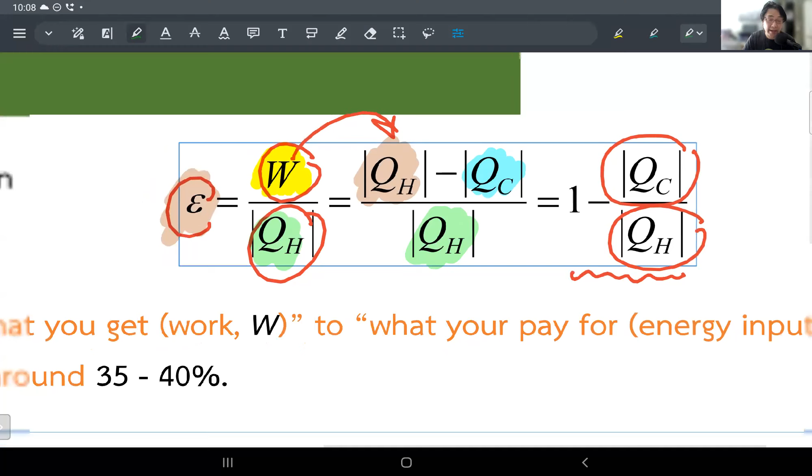Okay, guys, with me? So this is going to be the main equation describing the efficiency of an engine. This is it. What you get over what you have to provide, that is the key concept of efficiency in general. Like the example I talked about last time: I teach 2 hours. How many minutes do you actually get the material from this lecture? That's the efficiency already, right?

Okay, let's look at the quick example right here. So now we do some calculation. All right. You have a gas engine, burns 0.2 gram of fuel and delivers 2000 joule of work per cycle. So does that make sense? So this is what happens in your car engine. So you burn some oil, some gas and all this stuff, and then you get some energy from that chemical energy stored in the gas.

Given that the heat of combustion, that's the heat that you get after you combust a gas. You have the heat of combustion equal to 5 times 10 to the fourth joule per gram. So this means every gram of gas that you burn, you will acquire 5 times 10 to the fourth joule. Okay, cool. All right, find the heat discarded in each cycle and the thermal efficiency of the engine. All right, so that's good.

So first of all, you have only 0.2 gram to burn. And each gram, you get this much of energy. So how much energy do you actually get from the combustion? So that's Q equal to the mass that you're going to burn times the heat of combustion. So when you look at this equation, it looks like the latent heat, right? But that is just a general way of writing a product between the amount of mass times something per unit mass. That's what it is.

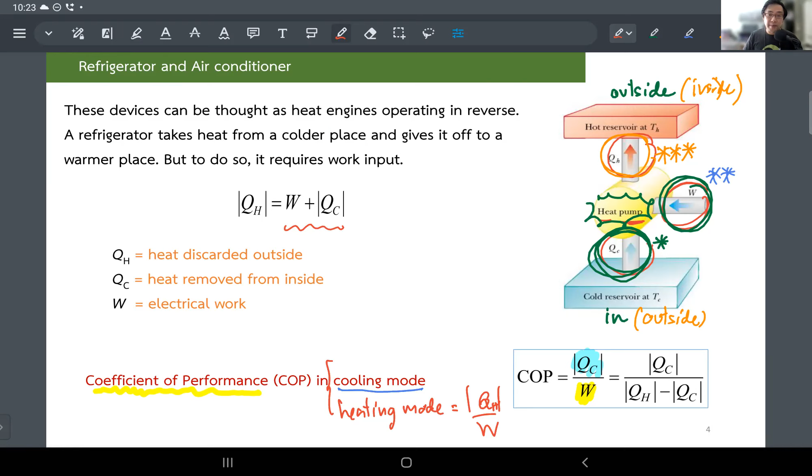So I hope you see the whole grand picture of the heat engine. And now what we are trying to get to is this. Now that is the fun part. What I am trying to get you to do is, first, apply the first law of thermodynamics. Second, know how to calculate the efficiency of an engine.

But now the third one: I'm going to introduce to you the part of the second law of thermodynamics. And that would be crazy. Once you sort of understand this concept right here, you will be able to tell what is going to be the best thermal engine in this universe.

All right. Tony Stark cannot do better than this as long as he wants to use a thermal engine, which he is not using, I guess. He used some nanotech or, I don't know, some weird nuclear, I don't know. All right.

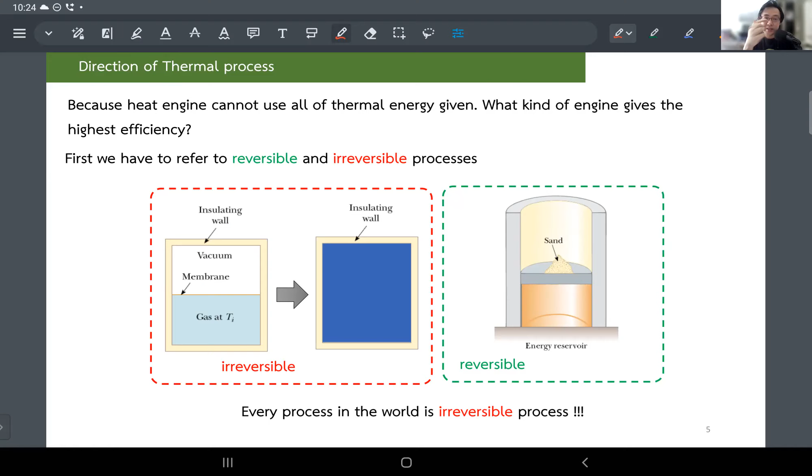Now look at this slide right here. Look at the left and the right. We have seen this already once or twice. You have a wall that is insulated. You have the gas in that tank. So you have a container with an insulated wall. And let's say the gas initially is at the bottom half of this tank. It's being divided by a membrane. Okay, sounds good. But then suddenly somehow the membrane just expires and it breaks. So the gas just fills up the whole space inside this container.

So we already know how to calculate this because it's PV equals nRT. So what you can do is PI VI over TI equals PF VF over TF. But then you already knew that the temperature will not change because you insulated everything. We learned about this one. There's no heat flow in and out. There's no work because it's not expandable. And from the first law of thermodynamics, this process is nothing. It's a free expansion. It just expands for free. You get nothing at all. So you know that the temperature will not change as well. So that's an application of the first law of thermodynamics.

I think you start to see the connections. So that means the temperature can be canceled. So this one is easy: the gas volume is twice as big, so the pressure will be reduced in half. So in terms of the property of gas, no problem, you can calculate it. But one thing that is sure, this process cannot get reversed. It's impossible to go back. So I am introducing to you now another word, the reversibility of the process.

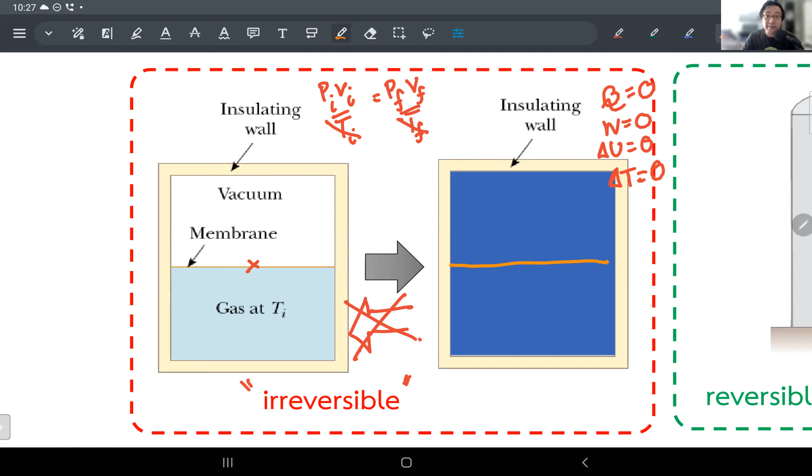There might be a case that you wait long enough and there will be some accident where all of those molecules suddenly decide to stay at the bottom half of the tank. Yes, there is a possibility there. But if you take into account the amount of molecules in this tank, it's going to be like Avogadro's number. To have those molecules with that big of a number in harmony, collectively, like, hey guys, let's gather around at the bottom half of the tank, for those of you who do math, the time for that will be longer than the age of the universe. So you wait until the end of the universe, you might not be able to see this event occur. Does that make sense? All right, so we will conclude that it's impossible.

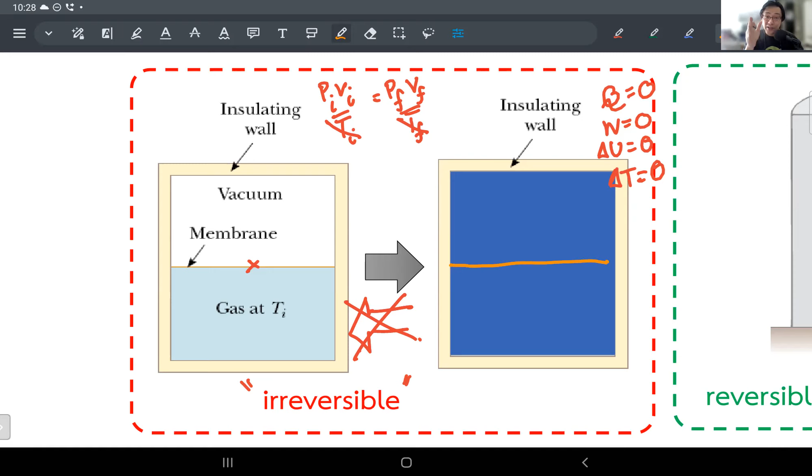Okay, forget about gravity for now. Time machine, gravity is later. That's not what it is yet. But we'll discuss a lot more fun with the concept of this irreversibility and time. They are somehow related. Anyway, so that's how irreversibility comes into the picture.

But now look at the right-hand side. It's almost the same scenario. So you have a gas, initially the exact same volume as this. But now you have a piston, a movable one that you can lower or raise up and down. And at the bottom, you attach this to the energy reservoir.

So when you have an energy reservoir, everyone understands that what it means is you fix the temperature, right? Because we already agreed that once you have some big source of energy, you cannot change its energy easily. It's too big for you to do anything. So that forces the gas in your container to have the same temperature as the energy reservoir. And this temperature will not change. So you already meet the same condition of no temperature change.

When no temperature is being changed, that means your internal energy will not change either. Cool. But because you have a movable piston there, you can actually do the work and there will be some heat flow. Okay, you guys with me?

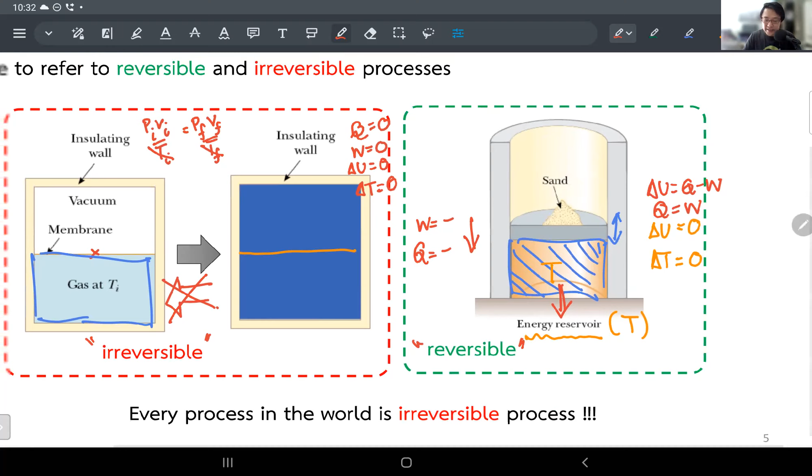You say, well, Ajahn, I changed my mind. I want to pick up the sand one by one. All right. And once you do that, it's going to slowly lift up because the weight that is pushing the piston down is getting smaller and smaller. So it's going to come up to the original position again. So in that case, it looks like you are trying to get to a process that is reversible. You guys with me?

And this is the thought process about the word that we skipped. I don't know if you still remember, but there is a word where I said, okay, I'm going to talk about this later. It's a quasi-static process. When I say quasi-static process, it means it's sort of static, but not totally static because you still want to move things around. But you move it so slowly that at any point in time, it looks static, and you do not disturb the system too much. Does that make sense? It doesn't make sense, I know. But yeah, that's what it is. So now you start to see, well, Ajahn, what we have been studying is in our imagination. The answer is yeah.

Oh, I still have the music on. I suppose you just have a sound effect right here.

The reason is, in reality, when you let the gas into a tank, it just flows, right? You have to wait a little bit for the gas to disperse everywhere, and then you measure the pressure. But right at the moment you let the gas into a tank, there'll be some part of the tank that doesn't have anything yet, and some part filled with crazy gas running around. So you have to wait for the gas to disperse and everything to be in equilibrium, and then you measure the temperature, the pressure, and everything. Does that make sense?

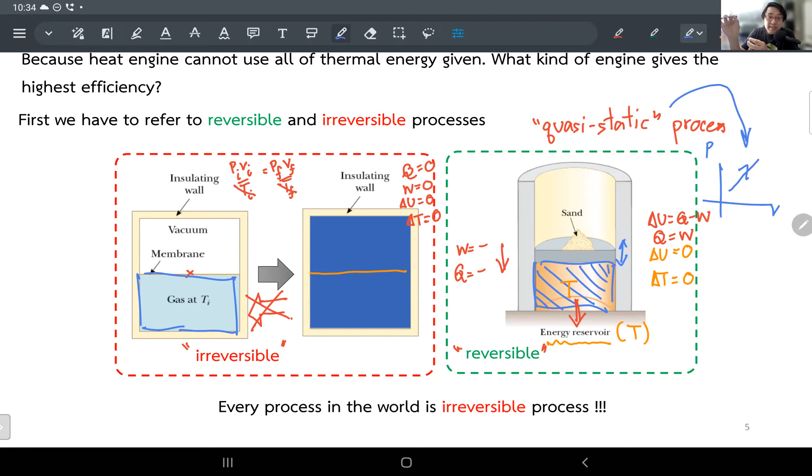So that's why whenever you have a PV diagram and you draw some process on it, that has to be done in a reversible way. That means to walk through those processes, you have to do it slowly enough, because at each point you should be able to measure the pressure and volume correctly. You don't have to move and stop, but the change has to be gradual enough for you to measure the pressure, volume, and temperature with good numbers representing the whole system. Okay, sounds good.

All right. But in reality, that's not what you do. So this is the reason for the weird conclusion of this slide. It turns out the process in this world, I use the word world, but I could say the universe, I think.

I just want to leave some possibility there. All right. Every process is irreversible, guys. Seriously. Woo-hoo. Yeah. All right. You're getting older. It's not reversible.

What else? You have a glass of water that's hot. You have hot coffee. You have it sit there. It's getting down to room temperature. It's not reversible. You cannot make the coffee hot again by itself, of course. I mean, you can warm it up using a microwave and stuff, but by itself it's not.

You have an ice cube melt at room temperature. You cannot reverse that process by itself. It's not possible. Yeah, you see? So every process that happens, those are irreversible. Yeah. All right.

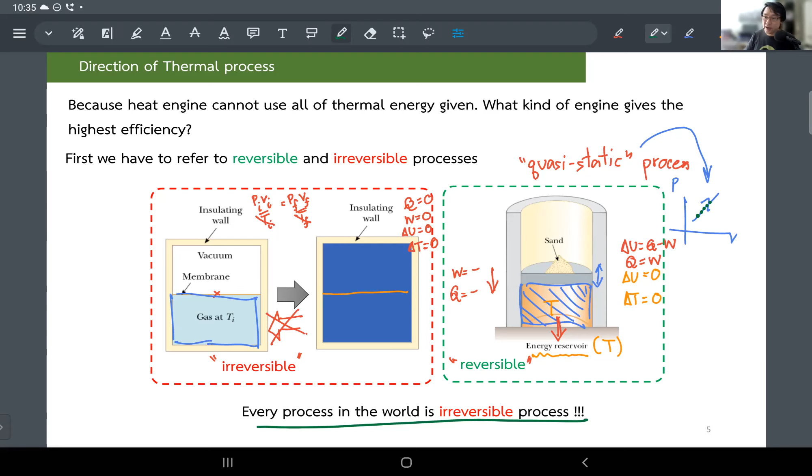There are a couple comments there. Oh, just wait there. Hold it. All right, we'll get to it.

All right. So why am I talking about this for so long? It took me like 10, 15 minutes to talk about this. Guys, look at this. This is very crucial. And it might sound vague to you, it might sound sort of unclear, but if you try to wrap your heads around it, it's going to make some sense. Okay, think about this. So now we are focusing on reversibility and irreversibility, okay?

So over here, you have a metal box, quite hot, 70 degrees Celsius. You have an ice cube in there at 0 degrees. Wait a little bit, the ice melts, the metal box cools down. You end up with liquid water at 40 degrees Celsius. This is good, but you are sure this is definitely not reversible. Impossible for you to go back. With me?

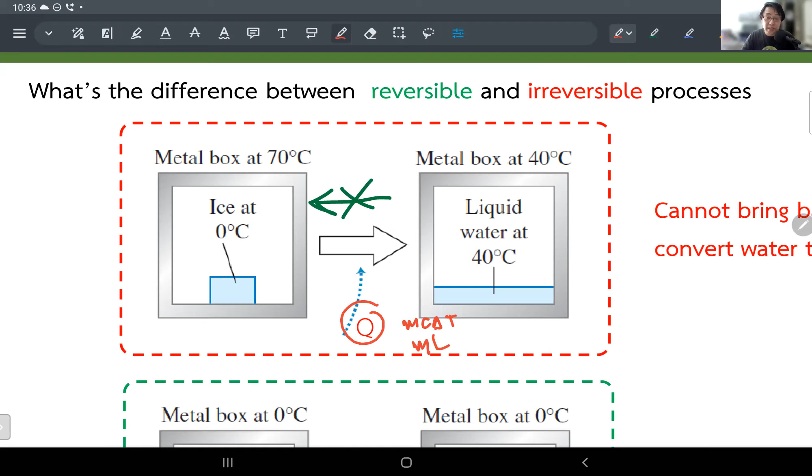And during this process, there is heat involved. You can calculate this using mc delta T, mL, and so on. You are able to calculate the amount of heat involved in the melting of the ice cube. Cool. This is good. Okay. Now look at the bottom case. You have a different kind of setup.

You have a metal box, but sitting right at the transition temperature, 0 degrees Celsius. And then you have an ice cube, the same one. But then, of course, the ice cube is just like, hey, I'm not sure what to do, because the metal box is already sitting at the same temperature. But due to the non-uniformity at the level of Avogadro's number, you cannot control millions of molecules to behave exactly the same.

There will be some portion in time, some fraction in space or whatever, where you might see yourself looking at liquid water at 0 degrees. But sometimes, all right, it's still solid, guys. But you're not so sure, because everything is already in equilibrium at 0 degrees Celsius, right at the transition temperature. So the best that you can say is this is still a reversible process.

Okay, so from the look of it, it seems like the melting process that might occur at this temperature seems to be reversible because you cannot control it. It doesn't really go away. It still has a chance, or you don't really know what is going to happen, but it sits right at 0 degrees Celsius. So you can say this is still reversible.

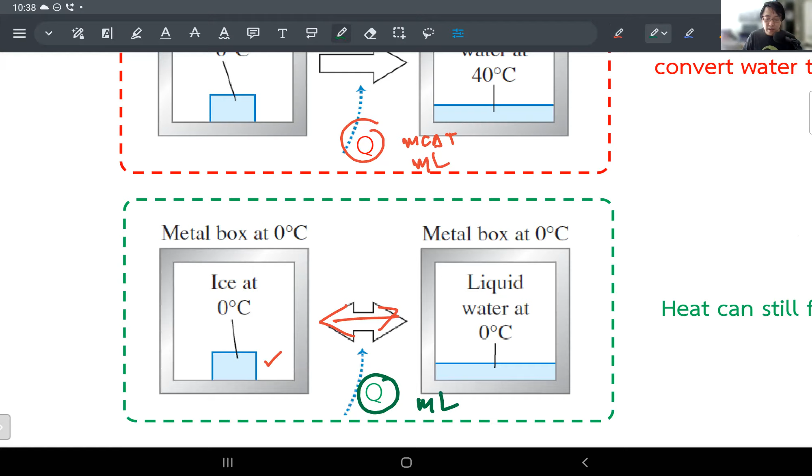The heat in the upper case is one way. It's one way. And whenever you have heat that runs one way and you cannot bring it back anymore, that means that heat is pretty much lost forever. You will not be able to bring that energy back. You have no chance to make it useful anymore.

Make sense? Okay. On the other hand, in the bottom case, you have heat involved, but this one is still with you because it's not going away. It's two directions, it's two ways. You can go forward and then you can still, hey, just take it back. So this still has a chance to do something useful later. So these two contrasting scenarios bring you to this.

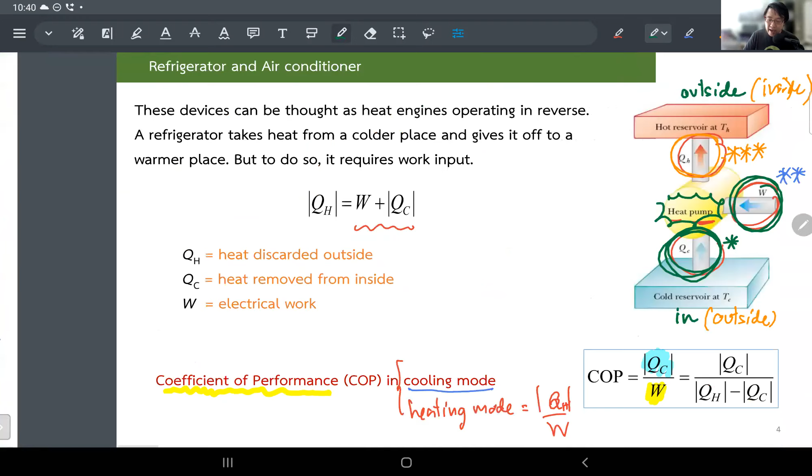So that means having the heat, use the red one, heat in this scenario is going to impact negatively your efficiency. You guys with me? You want to get the heat in this condition because that's the heat that is still useful for you later.

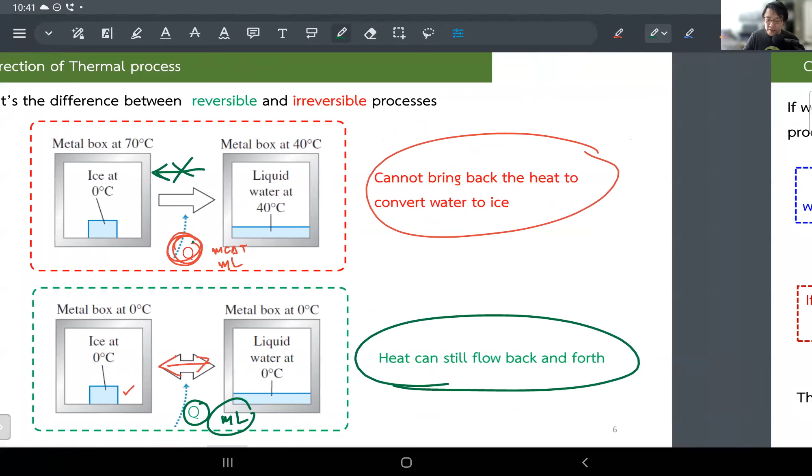And that's it, guys. Conclusion is this. Because you are trying to run a heat engine, okay? And then you try to draw the heat from the hot reservoir. You know that some of it is going to get thrown away in the cold reservoir. So you still have to change the temperature. You still have to have the heat flow in and out.

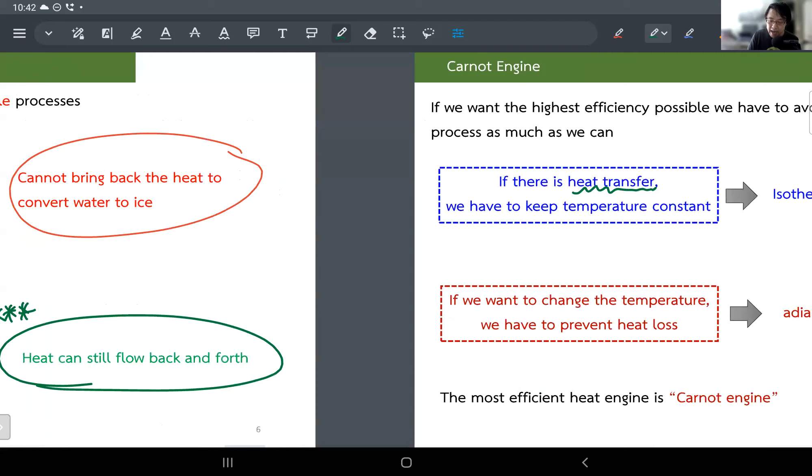But then the question that I'm going to try to answer is, what is going to be the highest efficiency that you can attain in the system? We just use this knowledge right here. Just say, okay, I cannot avoid it. So if we're going to transfer the heat, we are going to transfer it by not changing the temperature, because we can see that not changing the temperature is good. Whatever is going on in that scenario is still sort of not going away. So we're trying to use the isothermal process during the heat transfer step.

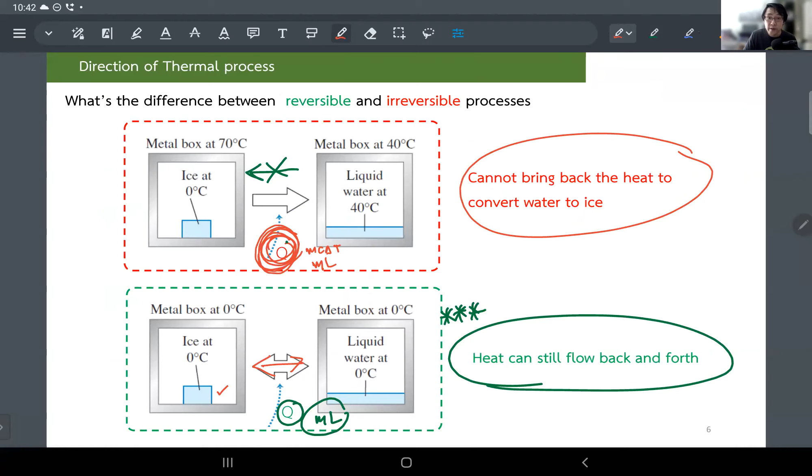With me? But then because you cannot avoid changing your temperature, if you are going to change your temperature, you're trying to minimize the heat that is going to be lost during that temperature change. How are you going to minimize it? We're gonna block them all. Okay. So what we're gonna do is, if you want to change the temperature, right, good.

Oh, my microphone is down. That's why it's not so clear.

So if you are at the point that you have to change your temperature, of course, I'm gonna not allow any heat to exchange, because that heat exchange is gonna hurt my efficiency. So I'm gonna do it through an adiabatic process. If you can combine the isothermal process and adiabatic process and build an engine based on these two processes, you're gonna get the best engine in the universe. And that has a name. It's named the Carnot engine. All right.

And that Carnot engine is going to be the best engine that can run between any two energy reservoirs. Other kinds of engines are going to have lower performance. This is going to be the upper limit of an engine that runs between two temperatures, the hot and the cold.

There's a question that comes in. So that's why the fridge has an insulator. Well, I think maybe that's not the real application of the insulated refrigerator. I think that's just to keep things cool. Yeah, that might have some effect on this. But the thing actually running is the compressor behind the refrigerator. That is your system. The coolant agent that runs inside your refrigerator is the one doing the thermodynamics. The inside of your fridge is just the one that keeps things cold. So they want to insulate it because you don't want other heat flowing into your fridge through other processes. I think that's what it is.

But now, let's say that you're starting from the point where you want to draw in the heat. Let me draw the diagram on the side. That's the upper half, that's hot, T hot. So I want to draw in the heat, that's Q hot. So we're starting from point A, the point when you want to pull the heat into the system. But we just said, every time that you have heat transfer, we want to do it through an isothermal process.

You guys with me? So this is a reason why I just want to ride along an isotherm during this process. See, I am on that isotherm. I'm not stepping out from this isotherm. That's right there. And during this process, I am pulling down Q hot, which actually you know how to calculate. If you remember from the isothermal process, the Q is just nRT log V final over V initial, but that's no big deal. You can do that calculation later.

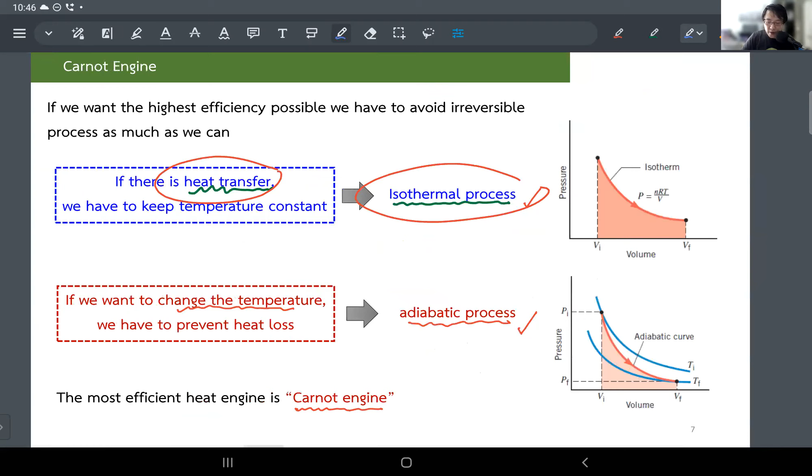Now, once you arrive at point B, you want to do something. I mean, to run an engine, you have to run between hot and cold reservoirs, right? So that means there must be some cold reservoir waiting for you to dump your heat out. Okay, but to do that, of course, you have to go to a different temperature. But then we just said, if you want to do a temperature change, you have to do it in an adiabatic process. So if I want to jump from the upper isotherm to a lower isotherm, a lower temperature point, I have to do it adiabatically.

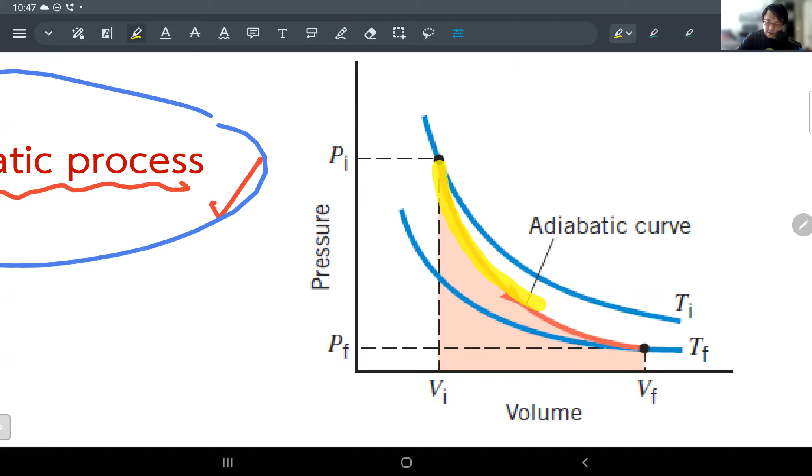And if you do remember, the adiabatic curve is the curve that is steeper than the isothermal line. Okay, so that's good. So that means during the expansion, if you want to expand the gas adiabatically, the curve will be steep right there. And that gives you a jump from a higher isotherm to a lower isotherm. So perfect. That's the jump that I want to do right there. Okay, so now you arrived at point C at lower temperature.

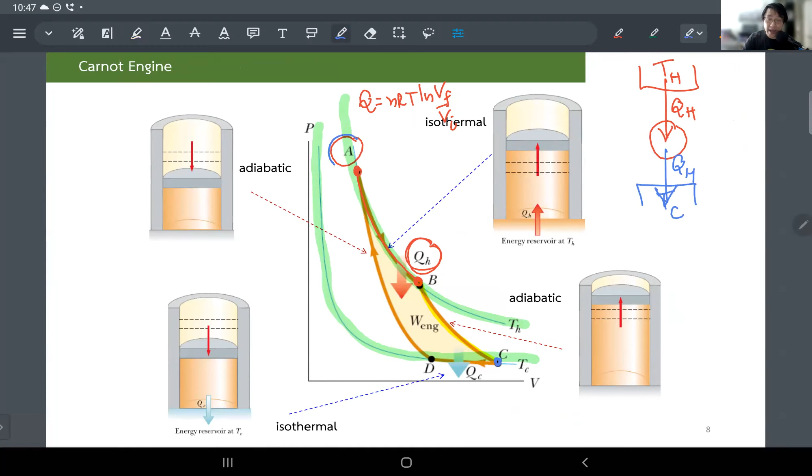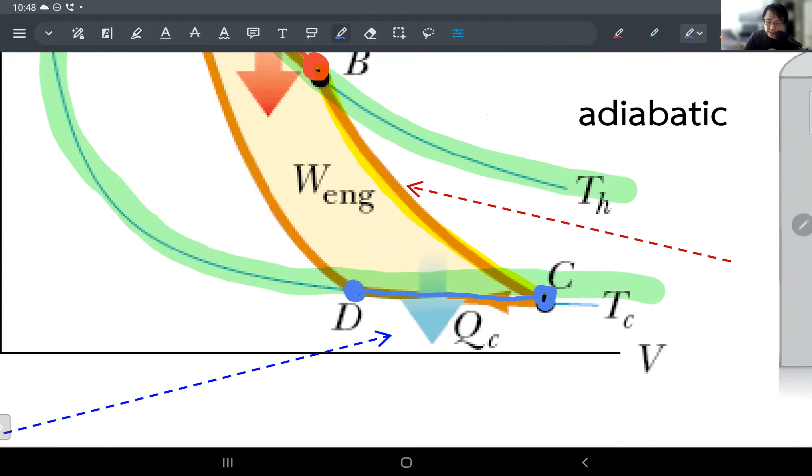But then, of course, things have to run in a cycle. So you have to aim back to get to A, because you want to get things in a full cycle, and then repeat this whole process one more time. So this is a good chance for you to dump out your discarded heat. And once again, the requirement is every time you want to transfer heat, you do it isothermally. See? So that's why from C to D, you are sitting on that isothermal line. You're not jumping out from this isotherm. And during this process, you discard that heat.

Once you arrive at point D, you want to run everything in a full cycle. You have to jump back to a higher temperature. So you want to shoot things back to A. That is another temperature change. Every time you want to change the temperature, you use an adiabatic process. So I have another adiabatic to shoot everything back to A. And that completes the cycle. This is the Carnot cycle. And the engine that runs using this cycle, that is the Carnot engine.

Okay. All right, guys, pretty good. And it turns out this is going to be the best engine in this universe that you are in. Other engines will run more poorly, cannot help. All right. And how good is this? It turns out I can prove it to you.

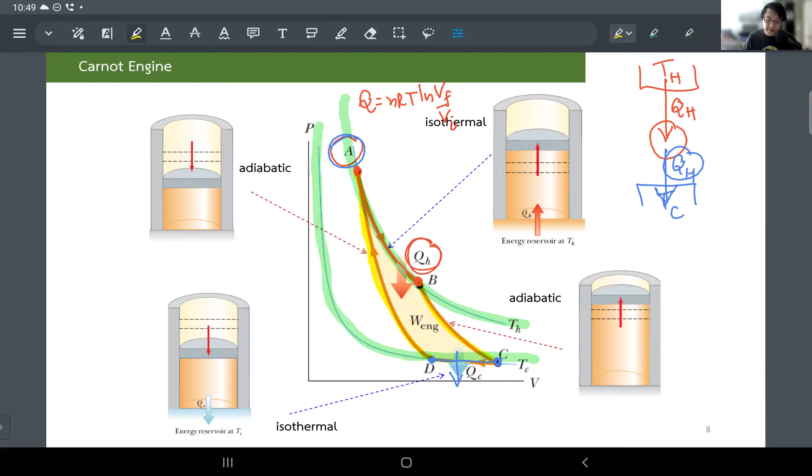And that would take me like 10 or even 15 minutes more. And you guys hated it so much a few semesters back, so I decided not to show you anymore. You guys didn't like that. But anyway, you have enough knowledge.

If you want to crank through this slide, be happy to. But the key is I'm not using anything much. I'm just using the results that we already learned before. You know how to calculate the heat involved during the isothermal process. You know how to deal with the adiabatic process using PV to the gamma equals constant. And then you have 4 equations, and you can look at the relationships on and on. Good news. The end result is super, super nice.

The end result is the ratio between the discarded heat, Q cold, to Q hot is exactly the same as T cold over T hot. Isn't that nice? So that means when you are talking about the Carnot engine, you can use the original expression for the efficiency, and concentrate on that ratio right here. That ratio can now be turned into just a ratio of the temperatures. And that is the best engine in the universe.

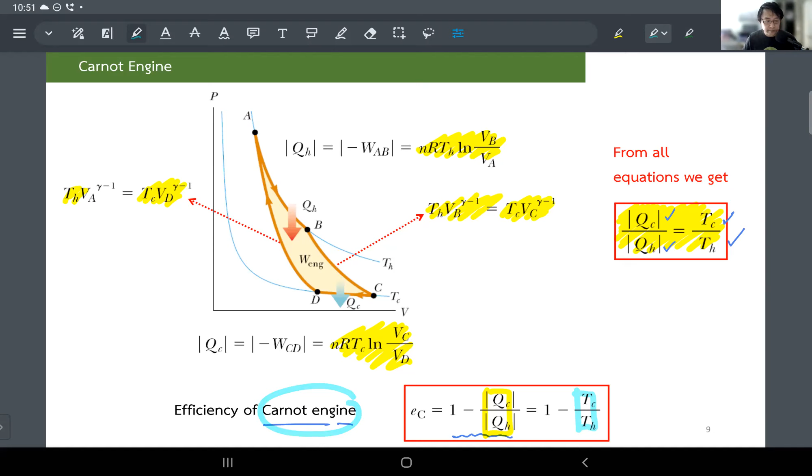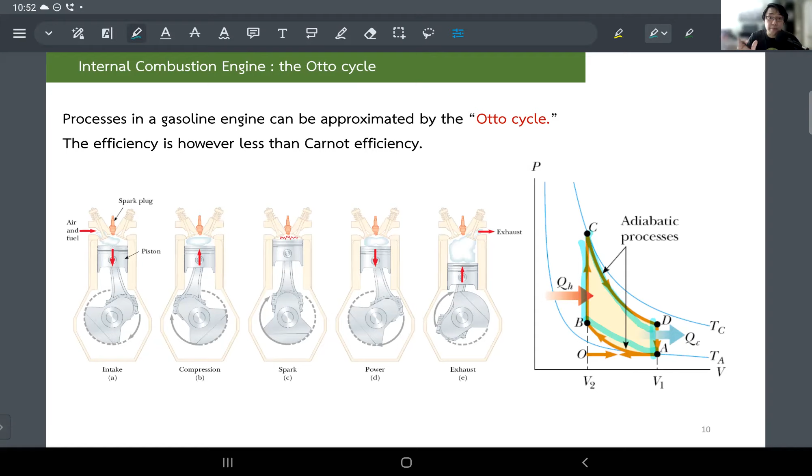That's all. But we are not going to go through a cycle that looks this complicated. We're going to look at something much simpler; the shape of the cycle is going to be easier. So let's take a break, and then we'll come back and dive into a real calculation. This is pretty much the highlight of applications of the first law of thermodynamics.

Okay, guys, let's take 10 minutes and we'll be back with more exciting stuff.

Let's start with this example. You have 3 engines operating between reservoirs separated in temperature by 300 K. Engine A runs between 1000 and 700 K, engine B between 800 and 500 K, engine C from 600 to 300 K. Which one do you think has the highest efficiency? You guys are kind of quiet today. Which one do you think has the highest efficiency?

By answering this, I think you'll have an idea how to answer why we cannot charge your smartphone using your body temperature. Anybody? All right, I'll do it. Oh, it's A, B, C order ranking. Okay, very good. So A has the highest, down to C. And another person, Thanapon, says engine C is the highest.

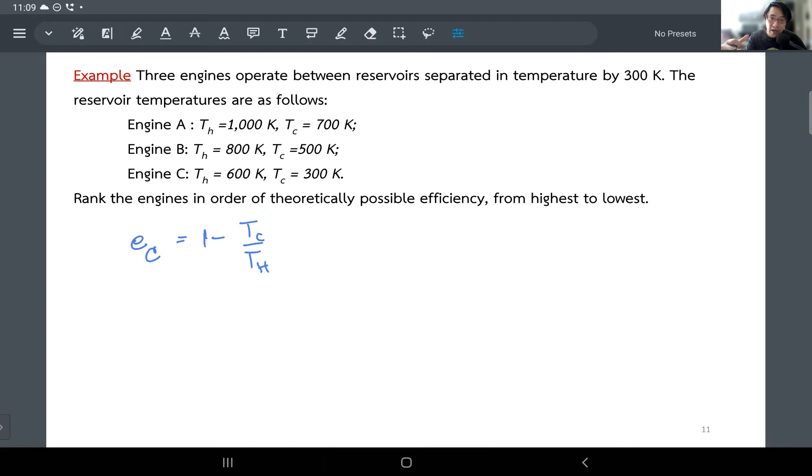Okay, here's the key. We know the upper limit of an engine running between any two temperatures is the Carnot efficiency, e sub C, equal to 1 minus T cold over T hot. You replace the ratio between the heat discarded and Q hot, the heat that gets into the system, by the ratio of the temperatures. You could just calculate these ratios out. But my extreme example is this.

What happens if you run with a difference of 300 Kelvin between 1 million and 1 million plus 300? If you are in some crazy star that is 1 million Kelvin hot, and you run an engine 300 Kelvin higher than that surface temperature, your cold part will be 1 million and the hot part 1 million plus 300. This ratio is very close to 1, so the efficiency will be very close to 0. You almost get nothing out of it.

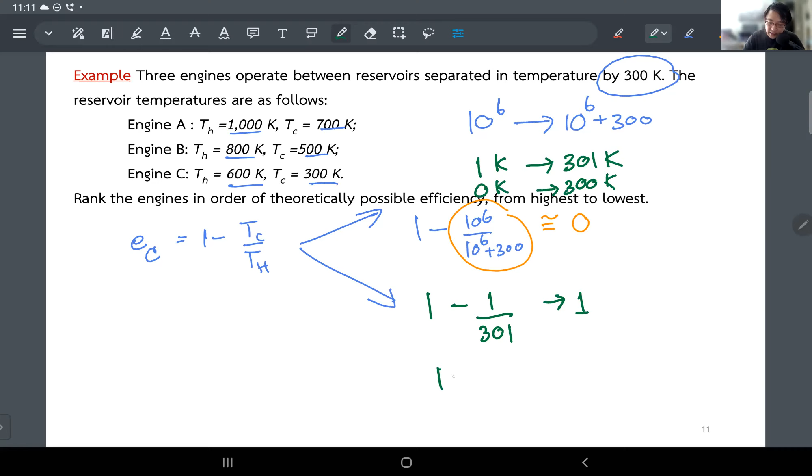On the other extreme, if you run the machine between 1 Kelvin and 301 Kelvin, that's also 300 Kelvin apart. Your efficiency will be 1 minus 1 over 301, very close to 1. Actually, it would be nice to run between 0 and 300 K. Then it's 1 minus 0, and you get 100% efficiency. But we already discussed this is not possible because 0 K is an unattainable temperature.

So this links the efficiency back to what we said: there's no engine in this universe that can run at 100% efficiency, drawing energy from the hot reservoir and turning it into useful work 100%. Got that? Looking at the Carnot efficiency expression, the only possibility for a 100% efficient engine is having T cold at 0 K.

Got that one? Okay. All right. So that's what it means: this gives you the upper limit of the efficiency that is possible. And in reality, you cannot build a Carnot engine. That's not possible. The actual engine will look like something else.

So if I'm going to use these concepts to build a USB device and use it to charge my smartphone, let's say my body temperature, T body, is about 37 degrees. So let's say it's about 310 Kelvin. And let's say room temperature is about 25 degrees. So let's call it 290K, the room temperature.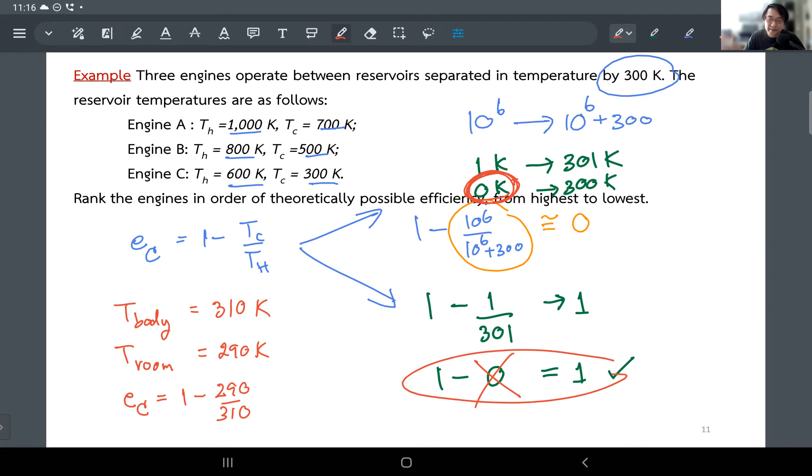And it's from, I would say, nature is not super calm. Nature is tickling something; something wiggles all the time in this universe. That's why you get something out of blank space from time to time. Well, there was a big bang and other stuff, so we still have an unanswered question. All right. So we'll get back to that.

Okay, guys, let's come back to this. We'll keep pushing these calculations further. You have a Carnot engine that takes 2000 joules of heat from a reservoir at 500K. So now the diagram will be useful. The engine takes 2000 joules of heat, and the hot reservoir up here is 500K. Then it discards some heat down to the colder reservoir at 350K.

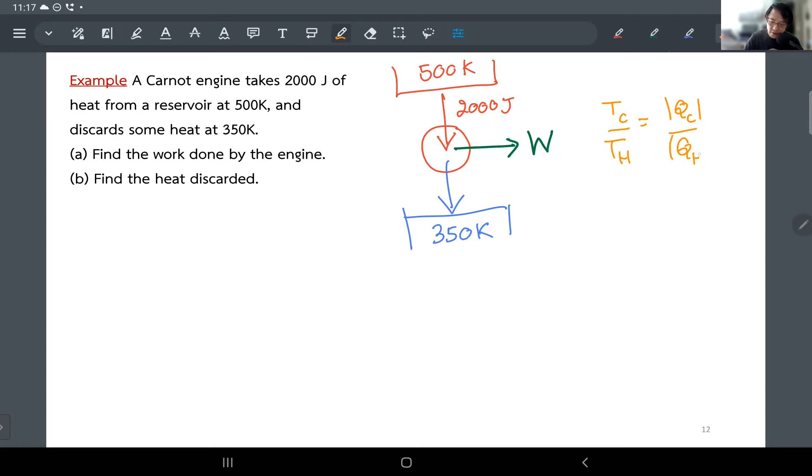Now the question asks you to find the work done by the engine and the heat discarded. Of course, there's something useful coming out right here. The straightforward way of doing this is using the Carnot relationship. Because it's a Carnot engine, the ratio between the temperatures is the same as the ratio between the heats that flow between those reservoirs. This is the main equation we can use for the Carnot engine.

We know the temperatures: 350K for T cold, 500K for T hot. Q hot is known to be 2000 joules. So from here you can calculate Q cold. And that's it. It's what? 1,400 joules. Is that right?

Oh, is that 1400? I think 1400. Sorry. That's not gonna be nice. You draw in 2000 and then you get 1400. All right. Okay, so that's what it is. That's 1400, get discarded right here. And that answers pretty much everything.

So the work done is just the difference between the two. You pull in 2000 joules of heat and discard 1400. So the work done is going to be 600 joules. Sounds good. And from this, you can even calculate the efficiency if you like. It's going to be what you get, that's 600 joules, divided by what you have to provide, and that is the 2000 joules of heat from the hot reservoir.

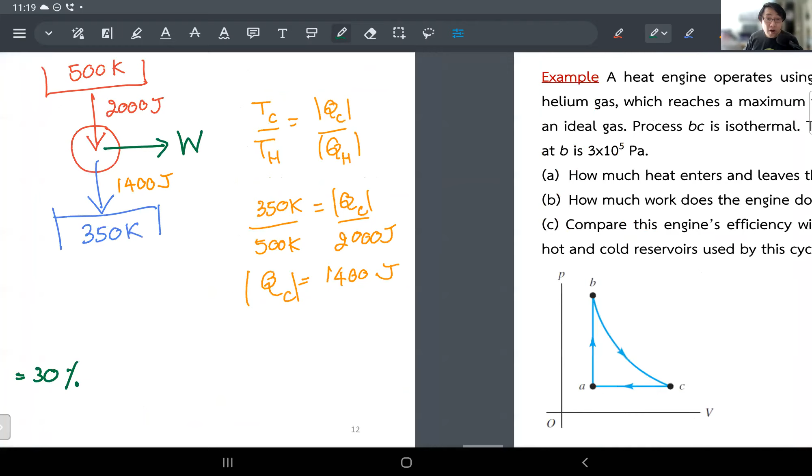Let's pull everything all together after 5 lectures and a half. Now is your time. We're gonna start dragging everything, the equation of state of the gas, PV diagram, all the processes, the way that you calculate the heat, the work, the change in the internal energy, combined with the efficiency of the heat engine. You have now a cyclic process in the PV diagram. Answer the following questions. All right, guys, this is the moment. All right, so this is it.

You have a heat engine that operates using the cycle shown. It has to be a cycle because your engine is supposed to run and run and run, in cycle. The working substance is 2 moles of helium gas. So we can assume that the helium gas is a monatomic gas, which reaches a maximum temperature of 327 Celsius. So let's get rid of this first, guys. Convert it into Kelvin, and just add 273. So that is going to give you 600 Kelvin.

All right, that's there. So they say it reaches a maximum temperature. So at least now you know it's supposed to be the highest point in the PV diagram. You guys with me? Because everyone knows now in the PV diagram, the higher the point, the higher the isotherm underneath it, the higher the temperature. So that's what it is. So assume the helium gas can be treated as an ideal gas. It has to be. We have no other way to do it.

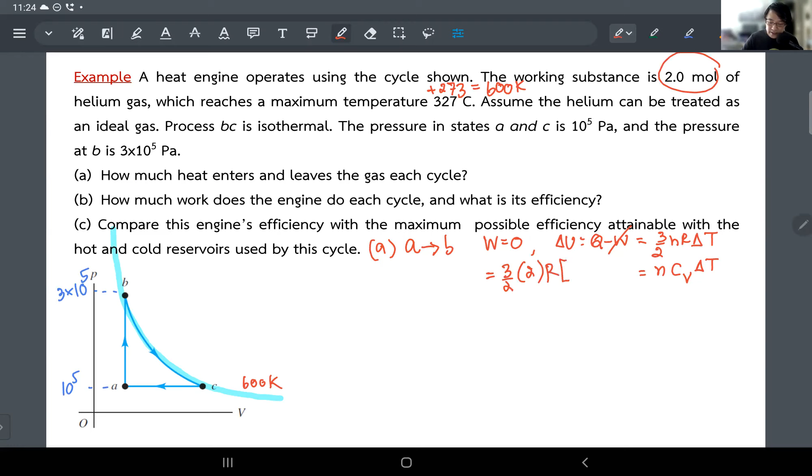Now the delta T is going to be T at B minus T at A. T at B is already known to be 600 K. So the only thing left for you to calculate is, can you figure out the temperature at A? Well, that's no big deal. That is just the states of the gas. So what I can do is PA VA over TA equal to PB VB over TB. Okay. And with that, because A and B are at the same volume, the volume cancels.

And because the pressure at B is 3 times the pressure at A, the temperature at B is going to be 3 times the temperature at A as well. So just to be clear, this is what we have been doing all along. So point A itself must be on another isotherm, correct? Yes. And now we know it's 200 K. 3 times lower.

Then that's it. Come back here, 2 cancels, 3 R times the change of the temperature. Final temperature is 600, initial temperature is 200. And then at the end, you're going to get 1200 R. That's it, in joules. Done. Okay. Is my number correct? Yeah, 1200 R. And that is positive.

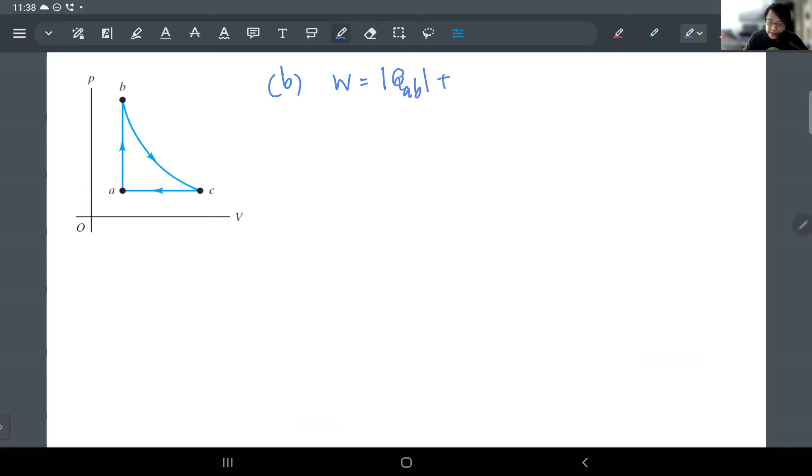So let's do that. So part B, the net work done is going to be, if I put the absolute sign here, Q_AB, that's in. So I take the positive one. BC segment, that's also in. And then I just subtract out Q_CA because I know that is the discarded heat. You guys with me? All right. And just to confirm your friend's point, it's exactly the same as summing them all. Same thing, but taking the sign along with it.

And all you have to do is plug in the numbers: 1200 R for the AB, and then you have 1200 ln 3 R for the BC, and then you subtract out, or you add, that negative 2000 R. And that's the work done, guys, for this cycle right here. And if you really do your calculation using calculus, if you want to find the area under the curve, we already agree on this.

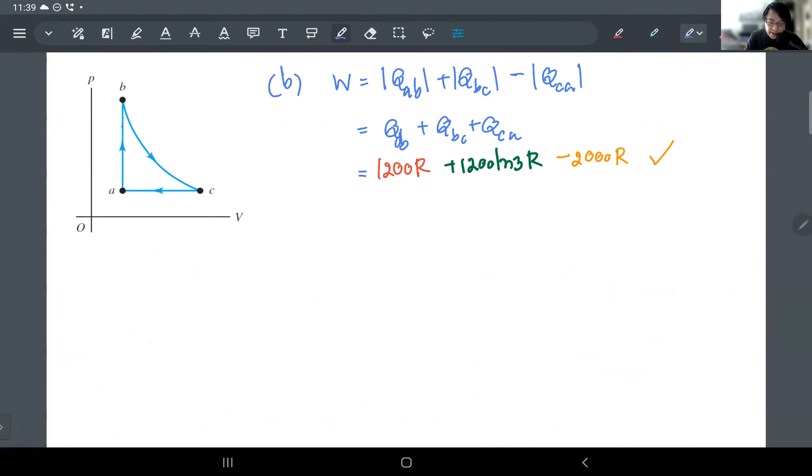Every time that you have a closed cycle like this, a cyclic process, the amount of work done is going to be the same as the area enclosed by that cycle. And if it's going clockwise like this, the net work done is going to be positive all the time. And that's already verified by this number right here. And what about efficiency? All right. Very good. So the answer comes in very nice.

So for efficiency, all you need is Q hot and Q cold. But the key of the hot and the cold is more like the in subtract by the out. So that's the purpose of this one. The in is these two heats right here. And the out is this dude right there. So the efficiency is what you get over what you have to provide. What you get right now is this W, you just calculated it.

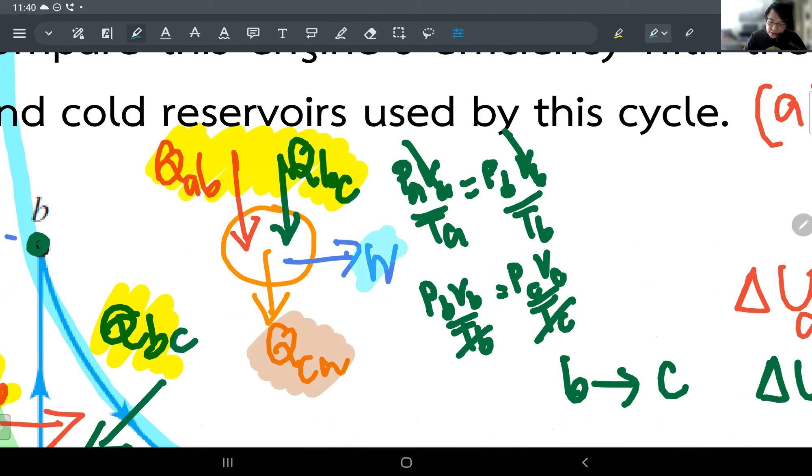So at the end, now you have all the information that you want. So it's going to be the W. Now let's use blue for that. That's what you get over what you have to provide, which is the incoming heat. That's it, guys. With me? The work done that you just calculated, you can plug it in here, and then you divide it by the heat that you have to draw into your system.

And of course, you can play around with this ratio because you know that W is just the difference between Q in and Q out. So all the numbers are there for you to manipulate. Cool. All right. And let's move on to part C.

Compare this engine's efficiency with the maximum possible efficiency attainable with the hot and cold reservoirs used by this cycle. The good thing about this one is you can calculate this number exactly, because we know all the numbers already. So let me try showing you this. From the numbers that we got, even though we have R all over the place, now you start seeing that what you're getting over here is going to be this number right here.

And you can start seeing that now all the R's cancel. You don't need all the R's. All right, so if you calculate this ratio right here, that will be the efficiency of this particular cycle. But then you want to compare this number to the numbers if this were to be a Carnot engine instead of this sort of curved triangle-shaped stuff.

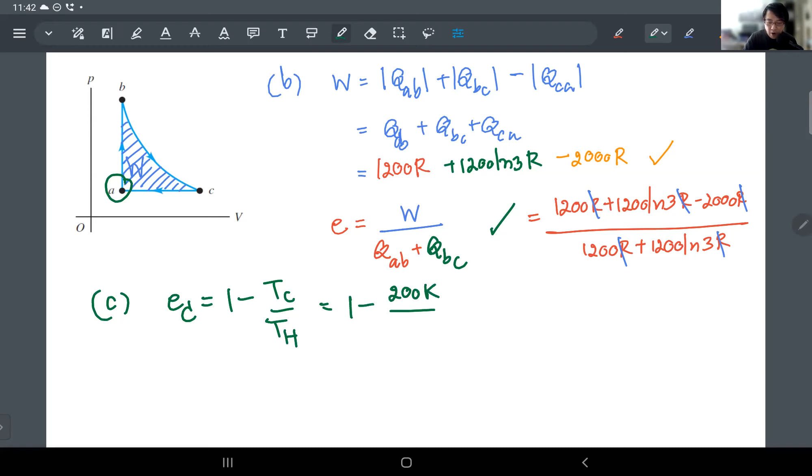So part C, the efficiency of the Carnot is going to be 1 minus T cold over T hot. So all you have to look for is, in this cycle, where is your coldest part and where is your hottest part? The coldest part is at point A and it's sitting at 200 Kelvin. The hottest part is either B or C, and that is at 600 K. So that means it's going to be 2/3 efficiency, or you can say it's about 66.67%.

Looks cool. Already. And that means the numbers that you're going to get from part B are not going to be able to compete with 66.67%. Oh, somebody got a different number. 0.206. All right, you guys, check my work. Did I do something wrong here? No, but efficiency is so easy. It's 200 over 600. So I'm sure the efficiency will be 2/3. That's going to be 2/3.

Thank you. Oh, for part B. Thank you very much. And that is 0.206. And this one is 0.667, let's say. Yeah. So as you can see, the given process is not very efficient at all. It's only like 20% efficient. But if you replaced this engine with a Carnot engine, then you get up to 66%. All right, got that one?

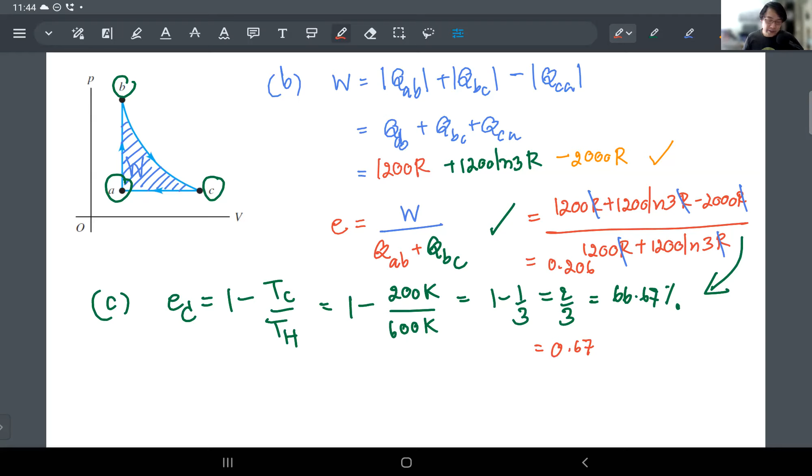Okay, and now you start seeing that I think the ultimate questions that you're going to face in the exam are like this. If I'm asking this, you pretty much have to calculate everything. Right? You have to do the work, the Q, the delta U, the efficiency, everything that you have learned is in here. All right, but I think you see the whole point.

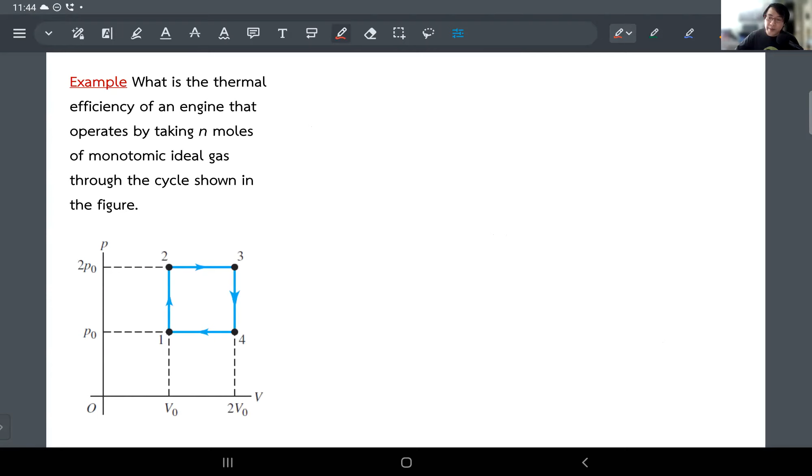Okay, let's do one more, shall we? That's going to be pretty much the last exercise of the day. And then next time on Wednesday we can wrap things up. If we can use this one on Wednesday as well, that's kind of nice, because we have another lecture to go through. So actually, why don't we do this? I don't think I can finish this one in 5 minutes. It might take 15 or 20 minutes to explain and go through. Why don't you take this exercise and try to do it yourself and see the results? And we can compare notes on Wednesday. Sounds like a good plan?